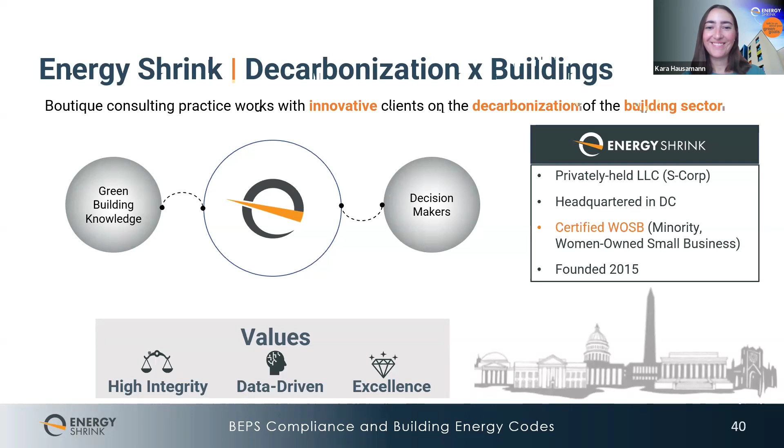We provide analytics such as energy modeling for LEED, state codes, and BEPS compliance, which we are about to discuss. We also provide green building policy advisory and research services. For example, we are doing a project with the DC Public Service Commission at the moment. So this combination of knowledge informs the services that we provide for energy analysis.

With that, I'm going to - Kara, should I do the handover now or later? Maybe I'll go through the next few slides and then hand it over to you.

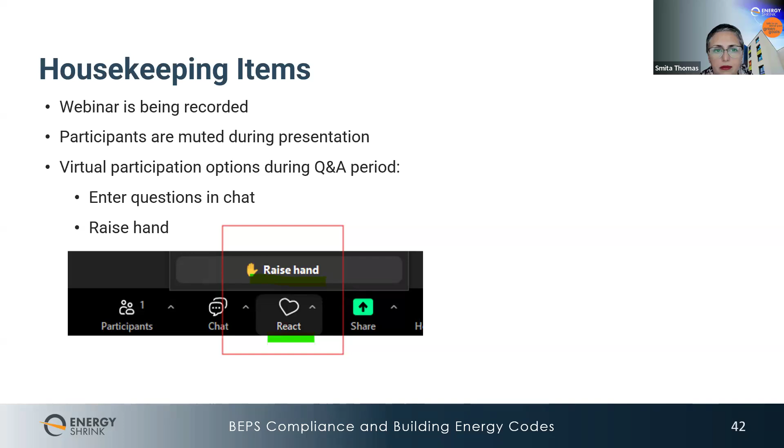So today in session 2, we'll do a quick recap of session 1. Then we'll talk about which laws apply to which buildings in DC. Lastly, we'll discuss the areas of the codes that get triggered with additions and alterations, including those undertaken for BEPS compliance. We'll also highlight some of the issues that commonly arise in the code applications submitted to the Department of Buildings.

This department is a fairly new department in DC, which focuses on the implementation of DC's ambitious requirements for buildings. We did actually speak to their staff about the common issues they see in these code submittal applications, so we'll be sharing their observations with you today.

As Smita mentioned, please hold your questions for the discussion period, and please note the slide number on which you have a question so we can easily jump back to it. That said, if you do have any quick clarification questions to help you understand the material we are presenting, please just put them in the chat and we'll answer them during the presentation if we can. Now I'll hand it back over to Smita to give a quick recap of the first session.

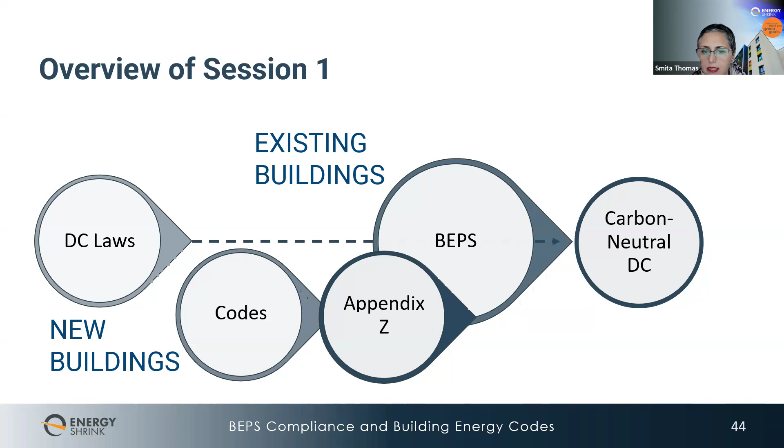So first, a quick recap on what we discussed for BEPS. Building Energy Performance Standards, or BEPS, set the energy performance criteria for the operations of all buildings. Currently, private buildings in DC larger than 50,000 square feet are required to comply with BEPS, or they will face fines starting in 2026.

The fines could be up to $10 per square foot, depending on how far you are from the target, which adds up to a lot, actually. Compliance with BEPS typically involves submitting energy performance reports and undergoing energy audits to ensure that your buildings meet the required standards. And in successive BEPS periods, DC is requiring successively smaller buildings to benchmark.

Buildings smaller than 25,000 square feet have already been caught in that net, and buildings smaller than 10,000 square feet will be required to as well. So each successive 5-year BEPS cycle for any given building, it's not only the size of the building that is reducing, which people are more familiar with, but also each successive 5-year BEPS cycle for any given building will be tighter to achieve carbon neutrality. We should expect this updated standard for BEPS every 5 years. So we just want to reinforce that.

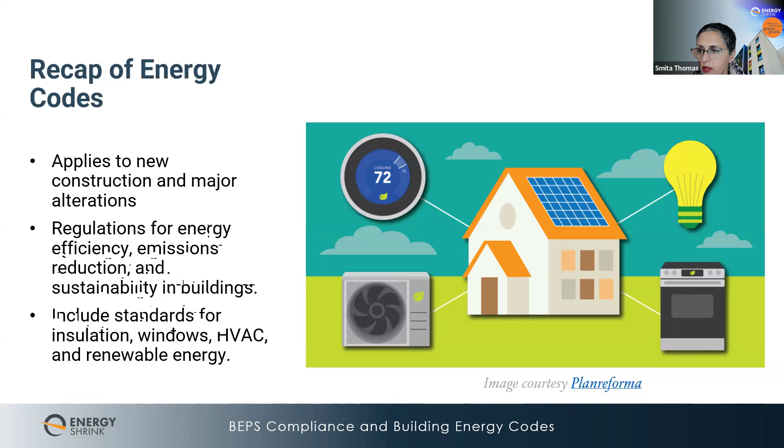Good planning and consideration during the early design phase of the building are crucial to ensure that buildings not only comply with the current DC energy code upon completion, but also remain compliant with the evolving BEPS standards throughout their operational lifespan. This will avoid having to repeatedly upgrade the building.

So overall, it's worth keeping in mind the big picture when planning and designing buildings. At a high level, the DC laws, the BEPS requirements, and the code requirements are all leading to a carbon neutral DC by 2045. And that's the end of the recap.

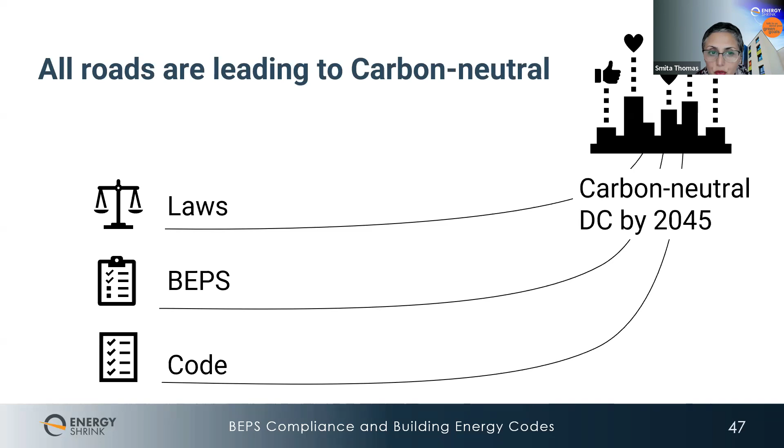Now let's dive into session 2. Kara, would you like to take on the next slide? Yes. So here, the application of the laws and requirements in DC is interesting because not all requirements actually apply to all buildings. For example, DC has a large presence of federal buildings, which actually have their own rules.

Starting from the top, the DC Policy Center tells us that DC has about 303,000 housing units. Of these, about 93,000 are single family units, and the rest, about 210,000, are multifamily. Any of those buildings larger than 10,000 square feet will be subject to some type of building energy standards. We also found from multiple other sources, both public and real estate studies, that the average housing unit area is about 750 square feet.

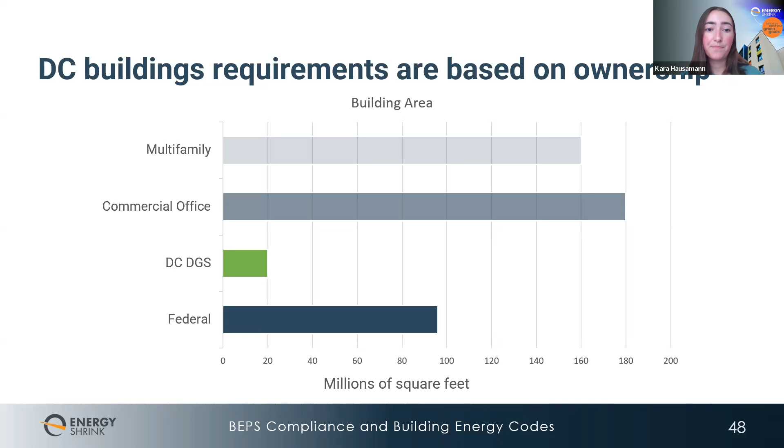So based on this, let's review which DC laws apply to which buildings. For the purpose of our webinar, which is focused on DC building codes and BEPS, the majority of DC building stock that would be subject to these requirements can be divided based on three main types of ownership. The code and building performance requirements change based on this ownership. So first, we have private sector buildings.

As we know, all private sector buildings over 25,000 square feet are now covered under BEPS in Cycle 2. Those larger than 10,000 square feet will be covered in Cycle 3. For new construction and alterations, they are currently subject to the 2017 code and will be subject to Appendix Z starting in 2026. Today, we will also cover the Green Building Act, or GBA, which applies on top of those building codes.

Public sector buildings are those that are owned by the district or funded by the district. Buildings are considered to be funded by the district if they receive at least 15% of their funding from district sources. These are also subject to BEPS on an advanced schedule.

So all DC-owned buildings larger than 10,000 square feet had to comply in the first BEPS period. In comparison, in the private sector, only those buildings that were over 50,000 square feet were required to comply in the first period. In addition, DC-owned or funded buildings also have to follow the Green Building Act, or GBA, and the amended GBA, which is actually the Greener Government Buildings Amendment Act, which we'll dive more into in a bit.

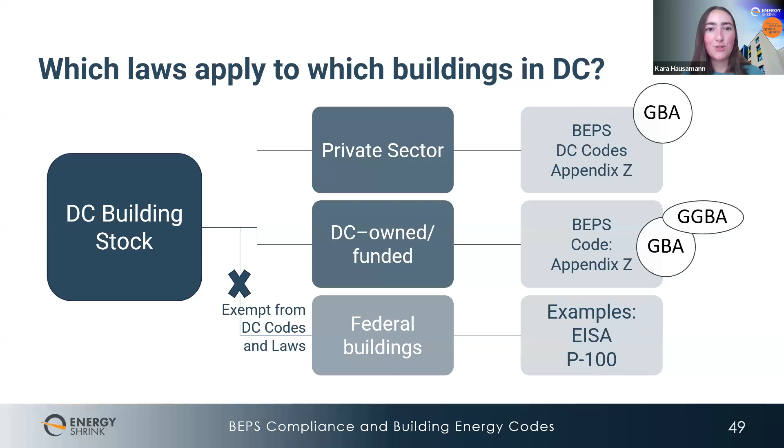Coming back to DC, what is DC's Green Building Act? The Green Building Act is a set of requirements on top of the building energy codes. The district's Green Building Act of 2006, also known as GBA, establishes high-performance green building standards for public and private construction projects. First, it requires that all non-residential district public buildings must achieve the U.S. Green Building Council's LEED Silver certification level or higher. It also says that district-owned or financed residential projects that are 10,000 square feet or larger must meet or exceed the Enterprise Green Communities certification standard.

Last, new private development projects that are at or above 50,000 square feet are also subject to the GBA, and they're required to meet LEED certification at the certified level or higher. Certified here is just the base level of the LEED certification. It's also important to note that if a project falls under the scope of the GBA, compliance with the GBA satisfies compliance with the Green Construction Code also.

We didn't get into this code in this webinar or the last one because it does not cover energy performance, but that is yet another set of sustainable building requirements in DC that covers aspects like site, water, and materials. And these are also covered by standards such as LEED. So meeting those standards under the Green Building Act puts the building in automatic compliance with that green construction code as well.

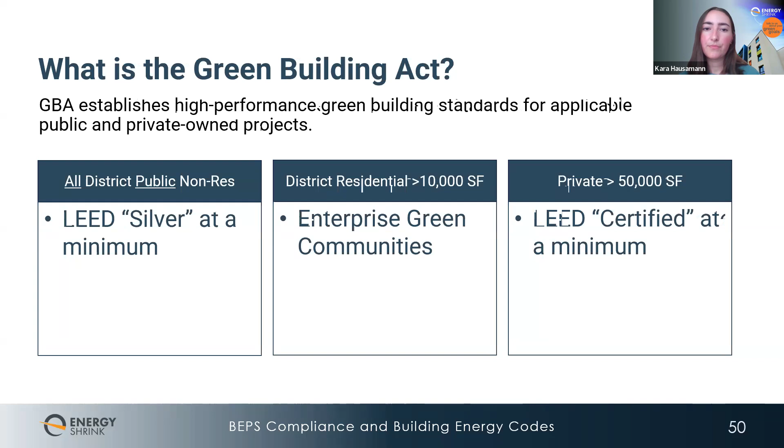The Building Innovation Hub actually also provides a DC Green Code tool that can be used to help figure this out more easily as well. And we'll have that linked later on. I really encourage you all to check out the several resources and tools provided by the Department of Buildings and the Building Innovation Hub to determine what requirements your building might be subject to.

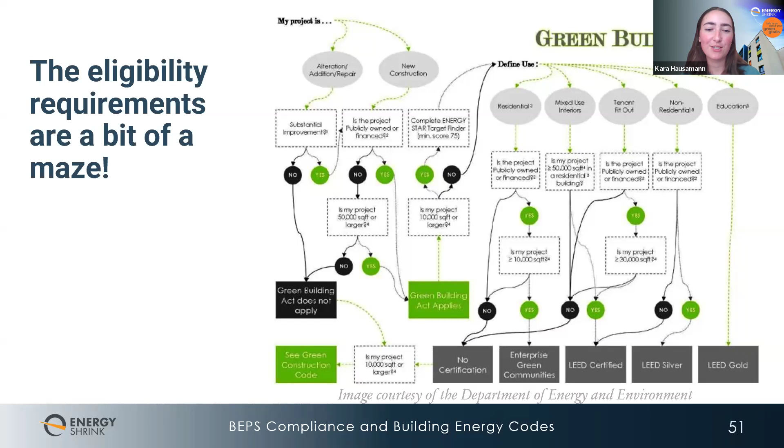So here, there is another new district law that impacts the public sector buildings, and this is the Greener Government Buildings Amendment Act of 2022, also known as the GGBA. And this went into effect about a year ago on October 1st of last year, so October 1st, 2023. This act amends the GBA of 2006 that we just discussed. As mentioned, the GBA covers public sector buildings above 10,000 square feet and private sector ones above 50,000 square feet.

The Greener Government Buildings Amendment Act levies stricter regulations on public sector buildings on top of those DC codes and the GBA. It requires additional green building features for government buildings and other publicly funded buildings in the district. As a reminder, a district funded project is one where at least 15% of the total cost is sourced from the district. So two key aspects of this act include the net zero energy standards and fossil fuel-free construction, which prohibits the use of fossil fuels in construction.

So the net zero energy requirement is definitely the biggest change introduced in the GGBA. It mandates that government-owned or financed buildings achieve net zero energy consumption, generating as much energy as they use. This means a public project will have to meet the Appendix Z requirements found in the 2020 Energy Code. Appendix Z requires projects to implement energy conservation measures to significantly reduce energy consumption, employ all-electric building systems, and utilize renewable energy sources to meet the annual energy demand. It's important to remember that although only applicable to public buildings now, starting in 2026, Appendix Z is expected to become mandatory for all new construction and substantial improvements.

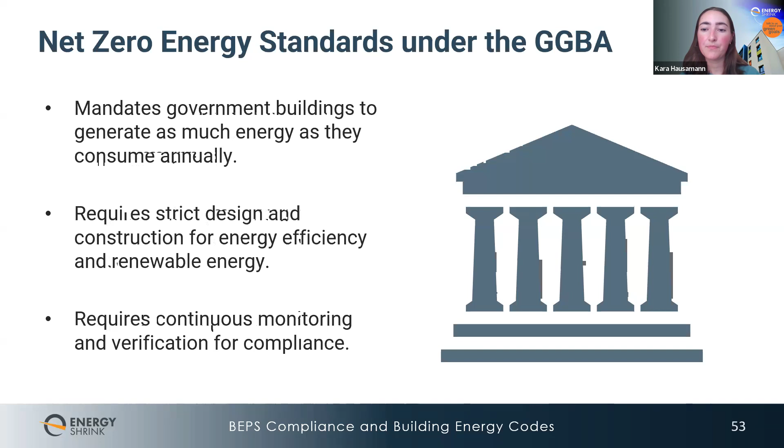GGBA requires fossil fuel-free operations in government buildings. This means eliminating the use of fossil fuels for heating, cooling, and powering buildings. For completeness, fossil fuels are hydrocarbon fuels extracted from the earth, like natural gas and petroleum. This prohibition of fossil fuels for building operations is in line with Appendix Z, but in addition, it also requires construction to be free of fossil fuels, meaning no diesel-powered machinery, no gas-powered heavy-duty vehicles. This prohibition contributes not only to mitigating climate change but also to improving air quality in the district.

The Act prohibits the use of fossil fuels in both government-owned or government-financed buildings. Instead, buildings covered by the Act must utilize renewable energy sources, such as solar, wind, and geothermal energy for their energy needs, whenever feasible. For example, new project design should consider making rooftop space available for solar PV installation. Off-site renewable energy can also be used, but there are limitations, such that renewable energy must be procured from a qualified electricity supplier that meets the standards set in DC's renewable portfolio standards. Renewable energy must be procured via a power purchase agreement for a minimum of 5 years for electricity generation from solar or wind facilities located in the district, Maryland, or Virginia. The Act also requires monitoring and verification to ensure that requirements are being enforced.

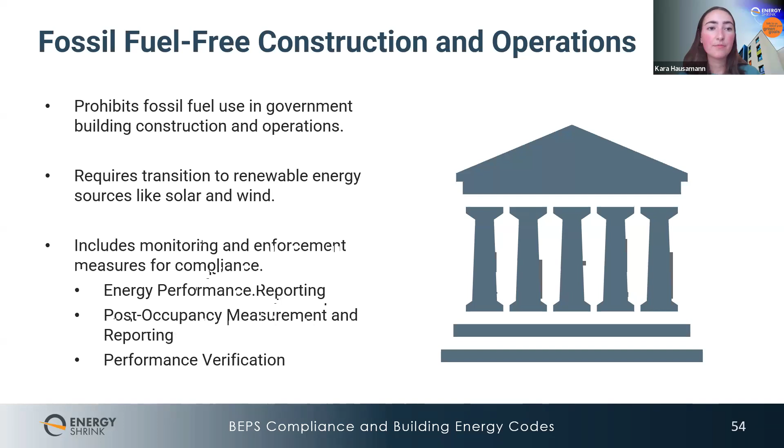The Act provides that when the district government is seeking to fulfill its facility needs—renting or purchasing a facility—the district will give priority consideration to buildings that maintain net zero energy compliance and to buildings that fulfill or exceed the LEED New Construction 2.2 standard or the LEED CS 2.0 standard at the silver level. This means that when the district government is considering locations for its offices, facilities, or other infrastructure projects, buildings that meet these sustainability criteria will be given preference. By prioritizing such buildings, this Act incentivizes developers and builders to adopt sustainable building practices and invest in energy efficient technologies.

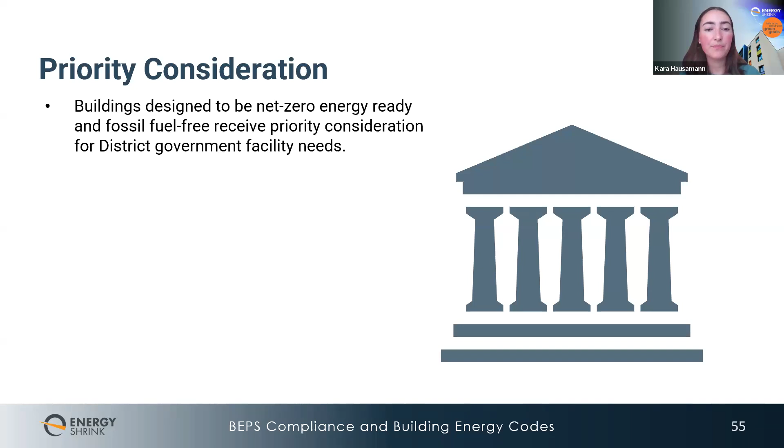Now let's take a look at whether the Greener Government Buildings Act applies to federal buildings. The answer is no. Federal buildings in DC are exempt from the GGBA, as well as other district building energy laws and codes, like Appendix Z. Federal buildings are managed by GSA and have to comply with federal energy efficiency and sustainability requirements, mandated by federal laws, regulations, and executive orders. A few examples include the GSA P100 facility standards, Executive Orders 13834 and 13693, and the Federal Building Energy Efficiency Standards, which establish mandatory design standards and performance criteria for federal buildings.

So the BEPS, DC codes, and GBA and GGBA content that we have covered applies to private sector and district buildings. And here I'll pass it back over to Smita, who will discuss alterations that trigger the DC Energy Code.

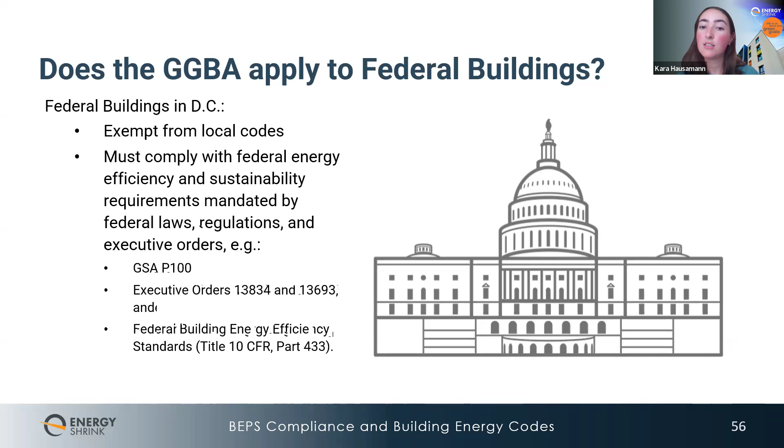In this section, we will discuss some typical alterations and the conditions under which they would trigger the energy code.

We've had this question in our mind ourselves, which is what led us down this path, so hopefully this helps you too. In developing this webinar, we wanted to understand areas where building owners were having difficulty with code compliance. We also met with officials at the Department of Building, who highlighted aspects of the code causing them challenges when reviewing submittals. We'll touch upon these common issues the DOB observes in project submittals related to building alterations.

The code states that major alterations must comply with the code. The building code categorizes alterations into 3 levels: level 1, level 2, and level 3. At a high level, level 1 and level 2 do not trigger the code, but level 3 does.

So what is the definition of each one? Level 1 alterations include the removal and replacement, or the covering of existing materials, elements, equipment, or fixtures using new materials, elements, equipment, and fixtures that serve the same purpose. So if you're simply doing any of these 4 things, but serving the same purpose, it doesn't trigger the code.

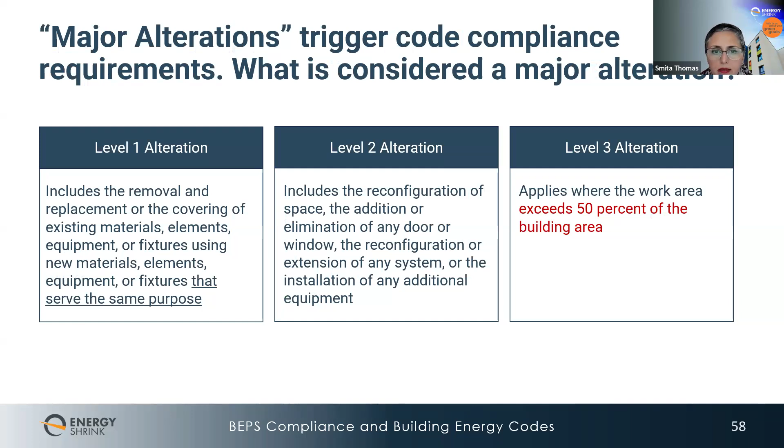Now let's look at the requirements for some typical upgrades or renovations we typically see around DC. The most common upgrades are lighting upgrades. LED fixtures are highly efficient compared to older lamps, and their costs have come down enough that most lighting projects have a 1 to 2 year payback. LED lamps also last 6 to 10 times longer than old bulbs.

When we do these building audits, we walk into the supply room of a commercial building and they have shelves lined with replacement lights. With LEDs, that lighting inventory can be much smaller because the lamps aren't burning out as often. So lighting upgrades are very common in DC.

At the same time, it's very surprising, but there are still thousands upon thousands of lights in DC buildings that are not LEDs. So we need even more lighting upgrades.

So what triggers code compliance requirements? When more than 50% of connected lighting load is being replaced, it triggers code compliance requirements. You have to actually do a calculation of the wattage and see what your connected lighting load is. So let's say you have 10,000 watts of lighting installed and you're replacing more than 5,000 watts out of that—that triggers the code.

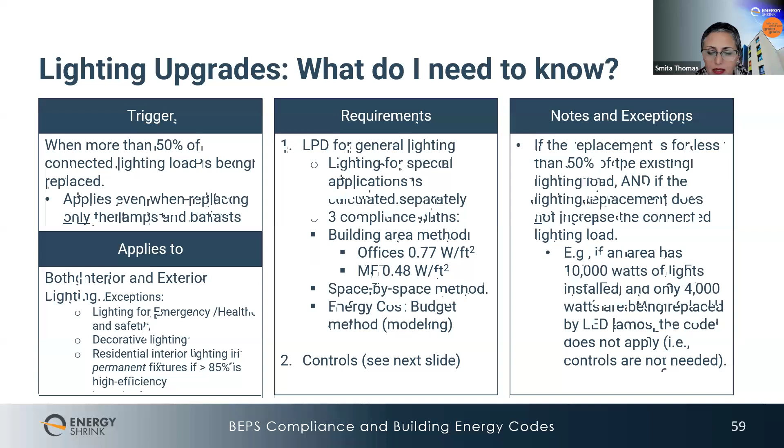The code not only has lighting power density requirements, it also has lighting control requirements to reduce energy use, and it is pretty extensive. The controls include automated and manual controls, which is basically a light switch, across various spaces in a building. The code applies to interior spaces, parking garages, special applications, and exterior lighting.

A word of caution here: even though we are sharing the code requirements with you today, we are only sharing what we consider the highlights of the code. We picked out the most meaty pieces, which we felt would resonate with people and which people must know about. But there are actually a lot of details in the code. If you are following the code or trying to follow the code, our advice is that you should read the lighting section from top to bottom to ensure that you're in compliance when doing a lighting upgrade. The same applies for other upgrades like systems or insulation.

A few examples of the requirements for interior lighting include that each space must have manual controls for all lighting—that means a light switch. You must have a light switch for all lighting. For spaces up to 10,000 square feet, there must be a manual control that is visible and accessible. For spaces over 10,000 square feet, each control should cover no more than 2,500 square feet.

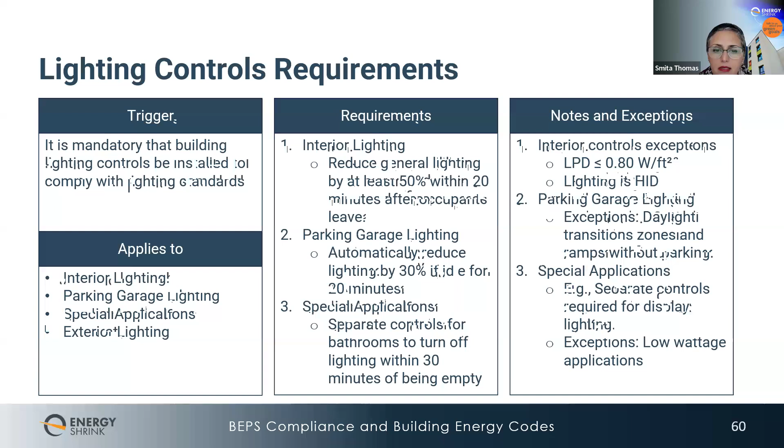Window upgrades—another very common type of upgrade that we see around the city. In general, alterations to the building envelope, that is the building skin, must comply with the requirements regarding insulation, air leakage, and fenestration as they apply to the specific parts of the building being altered.

So insulation is naturally in the walls. Air leakage is through the walls. A lot of people don't realize, but air goes right through brick, cement, and gypsum board, so when we talk about air tightness, you actually have to use special materials. There are requirements regarding insulation, air leakage, and fenestration, which is just a fancy word for glass windows and doors.

So any alteration that you're doing to any part of the building envelope has to meet the code for that specific part that is being altered. It doesn't kick in building compliance for the whole building, just for that part.

A common upgrade in older buildings is window upgrades. So if old windows are being popped out and new windows are being put in, then only the requirements for window performance will apply—for example, window replacement with different glazing. Replacing single pane windows with double or triple pane options will require energy code compliance. Even upgrades to more energy efficient options, such as low E windows, necessitate compliance because of the changes in the thermal performance of the building.

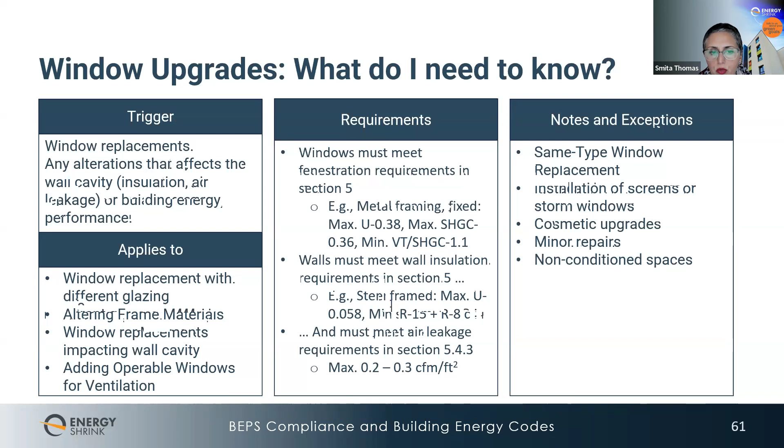Okay, this is another common type of replacement that we do in buildings, which is HVAC upgrades. Alterations to the heating, ventilation, air conditioning, and refrigeration systems in existing buildings typically do trigger energy code compliance for the equipment—just for the equipment itself. This would include direct replacement of existing HVAC equipment. The new equipment must meet the minimum efficiency requirements outlined in the associated table in the code.

If you're installing new cooling systems for previously uncooled spaces, which can happen as we are getting hotter—there are many buildings that are getting too hot for comfort, even multifamily apartments—we are having to install air conditioning. When they do that, they must comply with the code, and there are various compliance paths: a simplified approach for HVAC, a prescriptive path, and a performance path. But using one of these paths, you have to make sure that you're meeting the code requirements for the cooling systems.

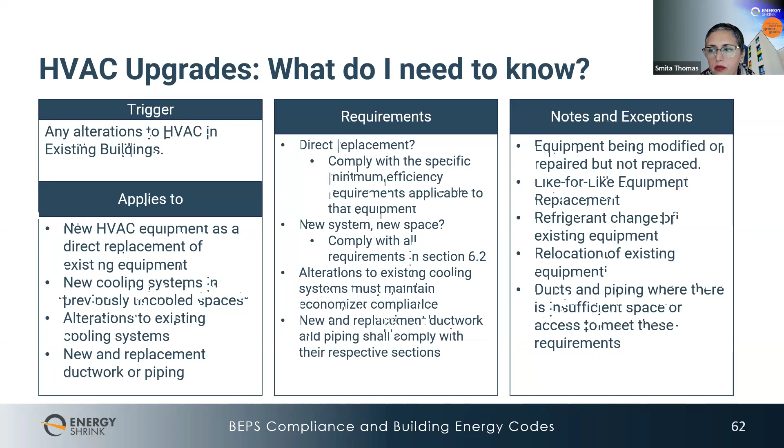So we're going to spend a little bit of time on heat pumps as an example, because this is a very common alteration we are going to see as we electrify our buildings in DC. Heat pump upgrades trigger energy code compliance because they generally involve changes that significantly affect the system's energy performance, capacity, and how it interacts with the building envelope.

So here are some examples. If you're upgrading to a larger capacity heat pump—so if you already have a heat pump and you're just upgrading to a larger capacity one to handle higher cooling or heating loads—it will trigger an energy code review. A larger unit may require upgrades to insulation, ductwork, and even the electrical system to meet the efficiency standards.

Another example is switching from a traditional HVAC system to a heat pump, which again we are going to see a lot of. Converting a building's heating and cooling system from a conventional furnace and air conditioner type to a heat pump involves changes to the system's overall efficiency, and this will trigger energy code compliance, especially if the fuel source changes.

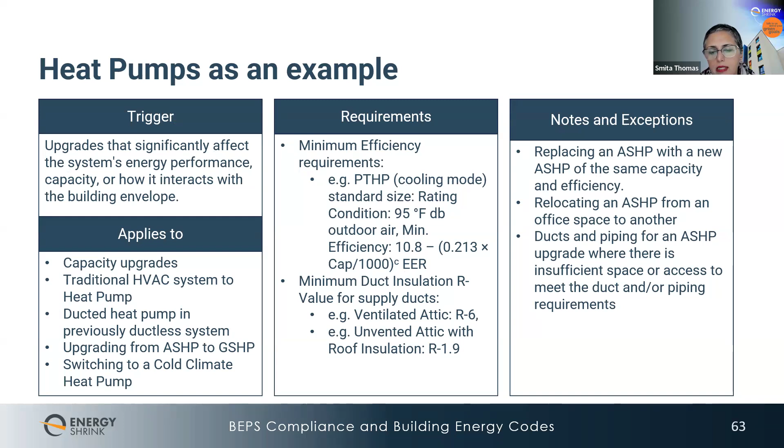This is another area, commissioning requirements, which we heard is a challenging area for design teams to meet. This section covers the construction and operational plans, commissioning and testing for buildings, focusing on the system's performance. Compliance with commissioning is crucial to ensure that the systems perform as per the design. There is an acceptance testing section in the code, and all projects must comply with it.

For new construction over 10,000 square feet and alterations over 20,000 square feet, project commissioning is required. Anything over 10,000 square feet must commission the following systems: HVAC systems, which must ensure that both mechanical and passive systems are being commissioned. Then building envelope systems, which verify the air tightness and moisture integrity. The commissioning must ensure that the building envelope complies with the building envelope commissioning section of the code. Lighting systems have to be commissioned to make sure the lights and controls are working as intended.

Any fenestration control systems - for example, automatic shading devices, and sometimes dynamic glazing, like electrochromic or thermochromic glazing, where it changes based on the temperatures outside - all those have to be commissioned. Renewable energy systems have to be commissioned. Irrigation systems have to be commissioned. Domestic and process water pumping and mixing systems are included in the commissioning list. Service water heating, of course, which is basically your water heating in commercial buildings. And energy and water measurement devices also should be commissioned.

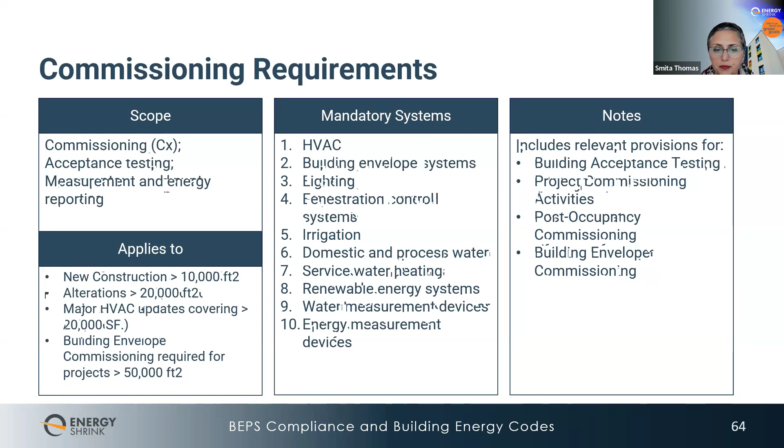So it's good to be aware of that and be prepared for it. Next slide, please.

So finally, we are talking about renewable requirements—this is the final slide in this section on what triggers code requirements. We kept this one because it's also very popular in DC, especially because DC pays really well for SRECs, the solar renewable energy credits.

A lot of people are installing solar systems. DC is paying upwards of $400 per megawatt hour generated, so we are seeing a lot of PV systems being put in.

For the prescriptive renewable path, there are several paths available for people to comply with the code: either a standard renewables approach or an alternate renewables approach. The prescriptive renewable path establishes requirements for new construction, additions, and major alterations that exceed 10,000 square feet. When you follow this path, you have to comply with either the standard renewables or the alternate renewables approach, which incorporates more efficient equipment.

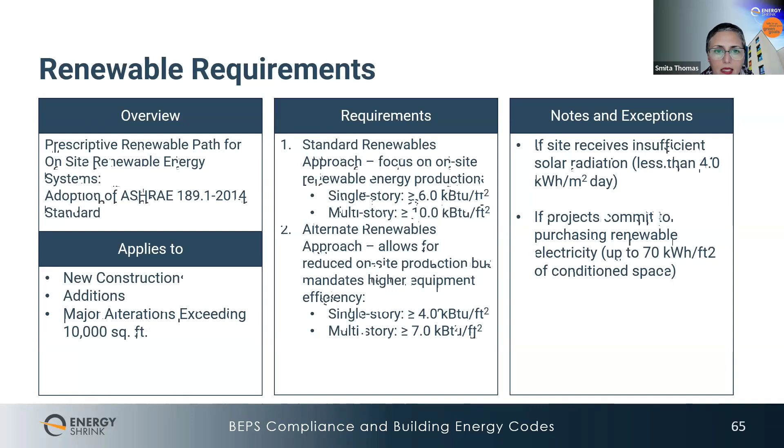To close this section, I'll underline a few areas that need attention when submitting code compliance documentation, based on our discussion with the Department of Buildings. In lighting, providing calculations for lighting power density and lighting controls compliance, and clearly marking the lighting controls on the drawings, is required. Drawings are often held for comments because they don't have correct lighting controls in each of their spaces—something to keep in mind.

The second area is wall insulation—insulating the walls as per code whenever they are disturbed or altered. Mechanical system load sizing calculations are also an issue; the Department of Buildings is finding this lacking many times in drawings, since mechanical engineers typically aren't providing the system load calculations except when asked, even though it's required by code.

Commissioning is another area where, as I mentioned, the team needs to provide evidence of commissioning, and it's often simply missing from code submittals. Finally, renewables—these are a requirement in DC, and correct calculations must be provided.

With that, I'll hand it back to Kara.

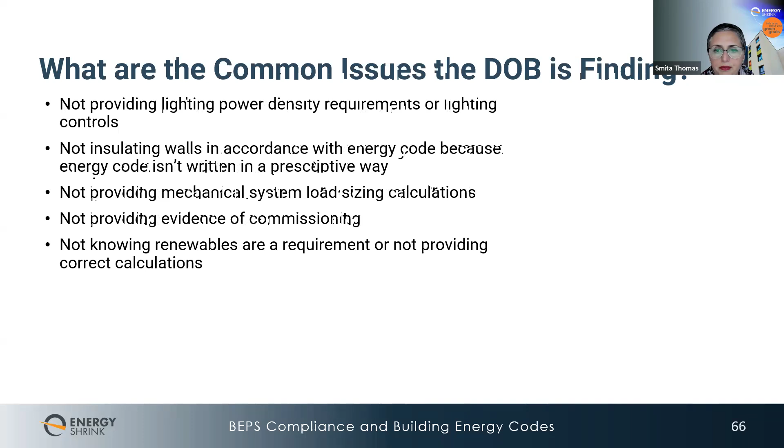Lastly, we wanted to highlight a few resources that can be helpful when navigating compliance requirements and staying updated on the latest news on these topics. The Department of Buildings sends out a monthly newsletter and has a newsroom page on their website. I also encourage you all to check out the Building Innovation Hub and the Department of Energy and Environment's Energy in the District page. Both provide several resources and tools applicable to these DC regulations.